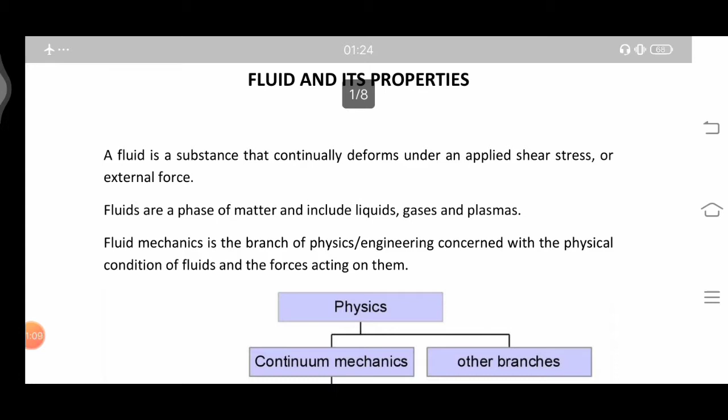Whenever we speak about fluid mechanics, we are basically dealing with the various properties of fluids and various conditions to which a fluid is exposed. That includes all the forces acting on them. Whenever a fluid is at rest or in motion, or due to its various properties, it will observe many kinds of changes or forces within itself. These are the things we are going to study in fluid mechanics.

First of all, let's read the definition of fluid mechanics. Fluid mechanics is the branch of physics or engineering concerned with the physical condition of fluids and the forces acting on them. As I said, it is concerned with the physical condition of the fluids, such as the temperature, density and viscosity, and the forces acting on it, whether it is at rest or in motion.

Okay, so what is basically a fluid? A fluid is a substance that continually deforms under an applied shear stress or external force. Suppose you consider a particular element of fluid and you apply some force on it, say a shear force; the fluid is surely going to deform continuously, unlike a solid, which may or may not deform.

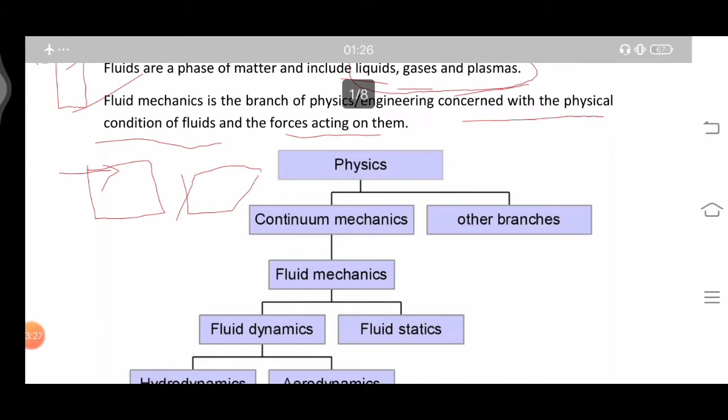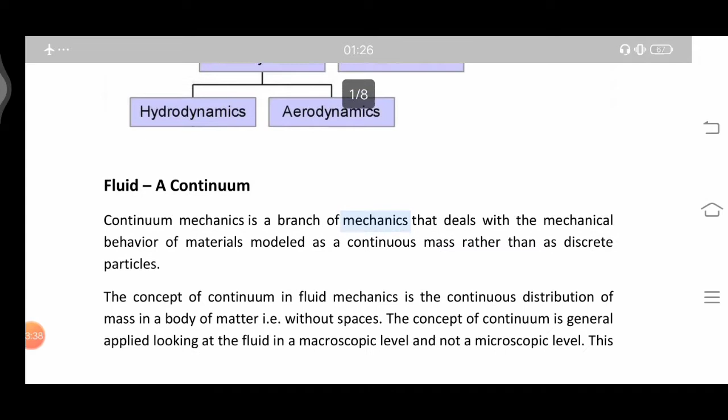Here one classification is given. If you take up physics, it is divided into continuum mechanics and other branches. So what is continuum mechanics? Continuum mechanics is the branch of mechanics that deals with the mechanical behavior of matter modeled as a continuous mass rather than as discrete particles.

In continuum mechanics we consider a body as a continuous mass of various particles, not just a single unit of discrete particles. We take up something bulk whenever we consider continuum mechanics. It is not like quantum mechanics, where we take smaller particles like the photon, neutron, neutrino, antineutrino, etc.

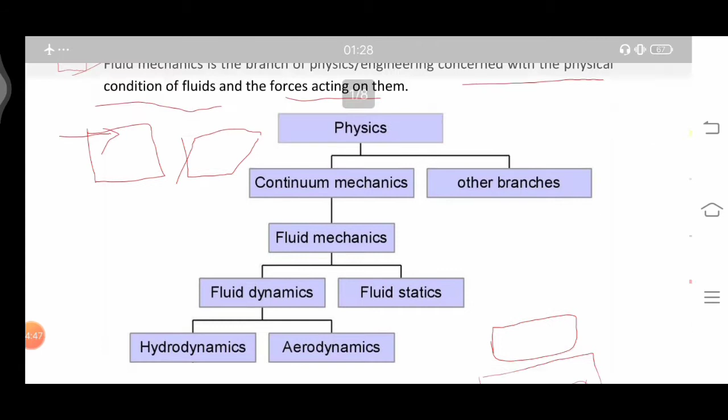So continuum mechanics deals with the mechanical behavior of materials modeled as continuous matter rather than discrete particles. Physics is divided into continuum mechanics and various other branches. Continuum mechanics includes solid mechanics, which we study in the subject known as strength of materials.

Apart from that, the other branch in continuum mechanics is fluid mechanics, which is further divided into two: fluid statics and fluid dynamics. By the name, fluid statics covers the forces or condition of a fluid when it is at rest, whereas fluid dynamics considers the same when the fluid is in motion.

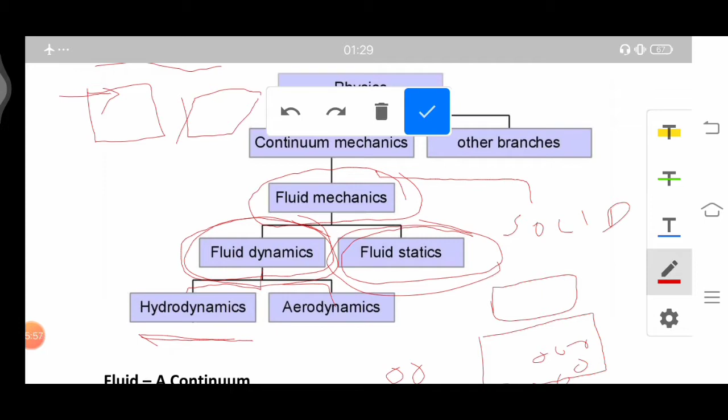Fluid dynamics is again divided into two branches, hydrodynamics and aerodynamics. There can be other branches of fluid dynamics, but mainly we consider hydrodynamics, the motion of water, and aerodynamics, the motion of air.

So considering that fluid is a continuum, the concept of continuum in fluid mechanics is the continuous distribution of mass in a body of matter that is without spaces. So if you consider the fluid mass very discretely, you will see that it is a continuous set of particles with minimum of the spaces between them. Okay, and therefore it is a continuous distribution of mass in a body of matter that is without spaces.

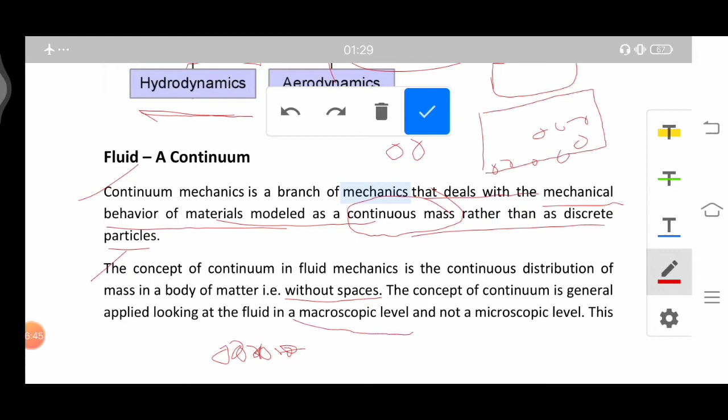The concept of continuum is generally applied looking at the fluid in macroscopic level. So we consider that the fluid is in macroscopic level and not in a microscopic level. So this helps in determining the fluid as a point function, like plotting the velocity profile of a fluid, measuring the temperature of fluid at a particular point in the fluid, etc. So assumptions are valid considering the fluid at macroscopic level only. So you cannot consider the fluid to be microscopic, we will consider it as macroscopic.

So that is why we are considering the fluid to be macroscopic, because in continuum mechanics we consider the object or the material to be of some continuous mass. So that thing is only possible if the continuous mass is present in bulk, which is solely present at the macroscopic level, not at a microscopic level. So therefore assumptions are valid considering fluid at macroscopic level only.

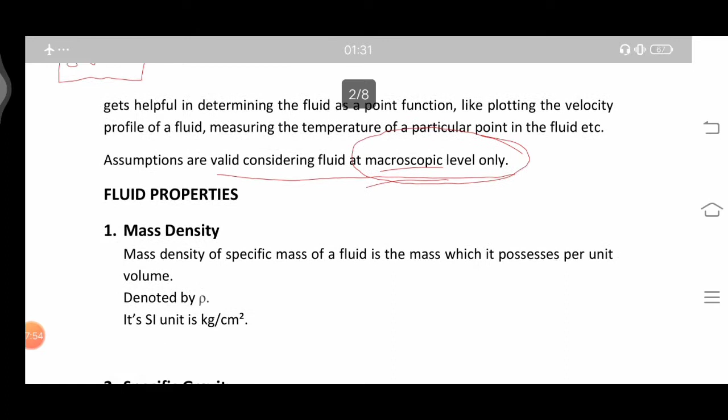So after we have this brief introduction about fluid and fluid mechanics, let us move on to the important part, that is the fluid properties. So first we come up with the mass density. So mass density is basically the specific mass of a fluid. Mass density or specific mass of a fluid is the mass which it possesses per unit volume. So basically it is the normal density which we deal with as the mass per volume.

Okay, so this is denoted by the letter rho. Its SI unit is kg per centimeter square, or it is actually kg per centimeter cube. It should be kg per centimeter cube.

Next, moving on to the next property, that is the specific gravity. So specific gravity is the ratio of the specific weight of a fluid to the specific weight of the given reference, that is the standard material. So when you consider the specific weight of a particular fluid with respect to the specific weight of a given standard, what we represent as a standard is the specific weight of water at 4 degrees centigrade, and this is our standard material. And with respect to it, when we take the specific weight of the fluid, we get the specific gravity.

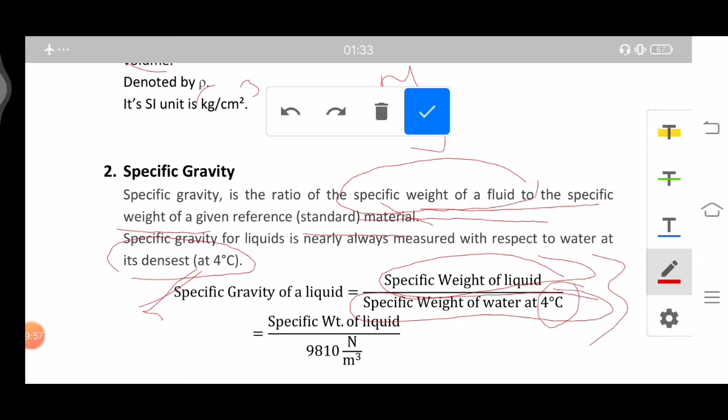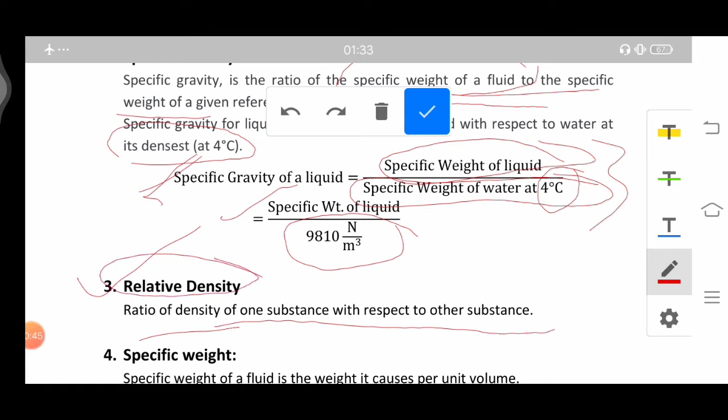So specific weight of liquid upon 9810 Newton per meter cube. It will be taken as 9810 when it is multiplied by 9.81 meter per second square, that is the gravitational acceleration. Next is the relative density of one substance with respect to another substance. It is actually the ratio of the density of one substance with respect to another substance. Suppose we consider the density of one particular oil, so with respect to water it has this much density. So when we are comparing two liquids, we take up the relative density, and similarly we also take the specific gravity when we are comparing.

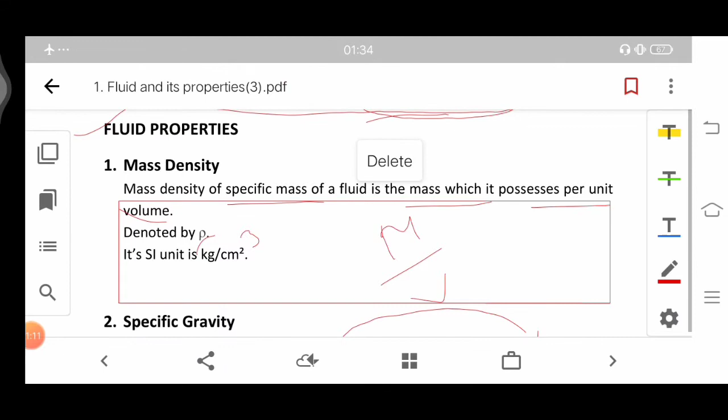Next comes the specific weight. The specific weight of a fluid is the weight it possesses per unit volume. So the weight of the fluid per unit volume is the specific weight. So just do not confuse it with mass density. Mass density is the mass per unit volume, whereas the specific weight is the weight per unit volume and denoted by the letter gamma. For water it is gamma W and its SI unit is Newton per meter cube.

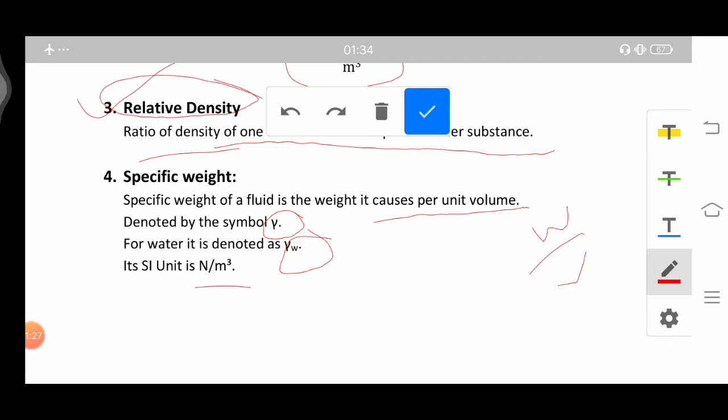Next is the specific volume. Specific volume of a fluid is the volume of the fluid per unit weight. It is the reciprocal of specific weight, and thus the SI unit is meter cube per Newton. So specific volume of a fluid is basically the reciprocal of the specific weight. So here we can say that it is volume upon the weight. Therefore the SI unit comes out to be meter cube per Newton.

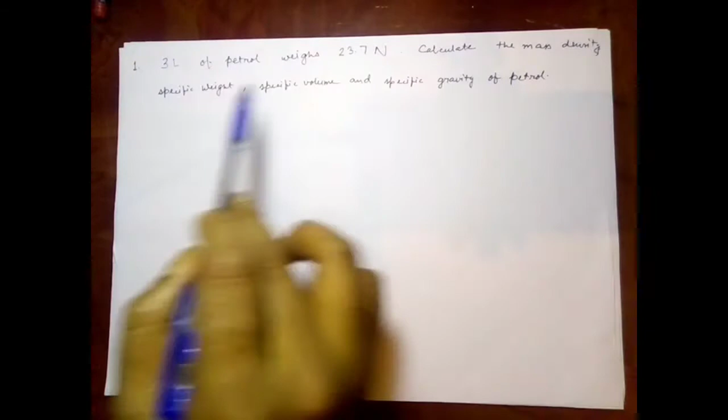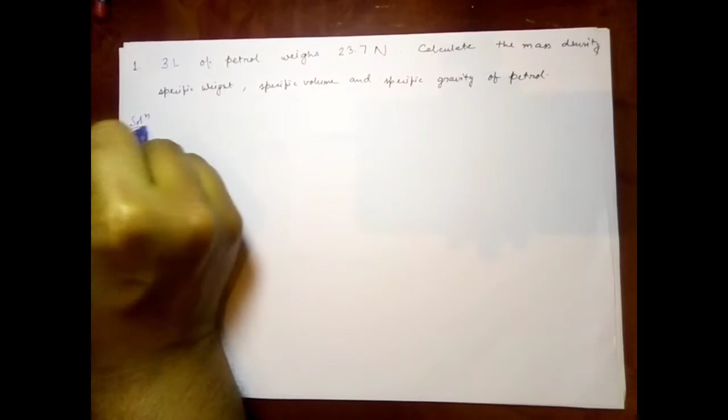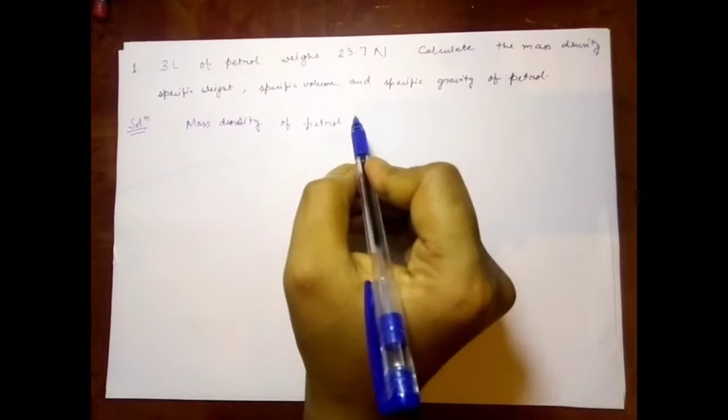So let us take up a problem. 3 liters of petrol weighs 23.7 Newton. Calculate the mass density, specific weight, specific volume and specific gravity of petrol. Whatever definitions we have learnt now will all be applied in this problem. Let us consider the mass density first. The mass density of petrol, let us take it as rho p, will be mass by volume.

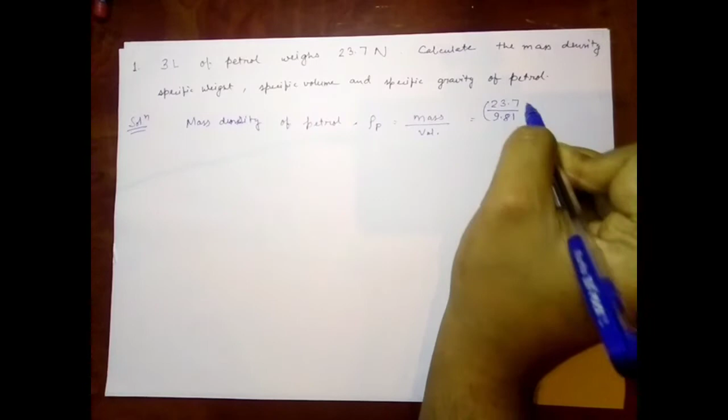So how to get the mass? Mass is basically the weight, 23.7, upon the gravitational acceleration, that is 9.81, upon the volume which is given as 3 liters. Upon calculating this we will get 0.805 kg per liter, because this is in kg and this is in liters, which is actually 805 kilogram per meter cube.

Next is the mass density of water. Mass density of water, let us take it as rho W, is actually 1000 kg per meter cube. You can take it as that. And specific gravity of petrol will be 805 upon 1000. Specific gravity is basically the ratio of these two, and it will be 0.805.

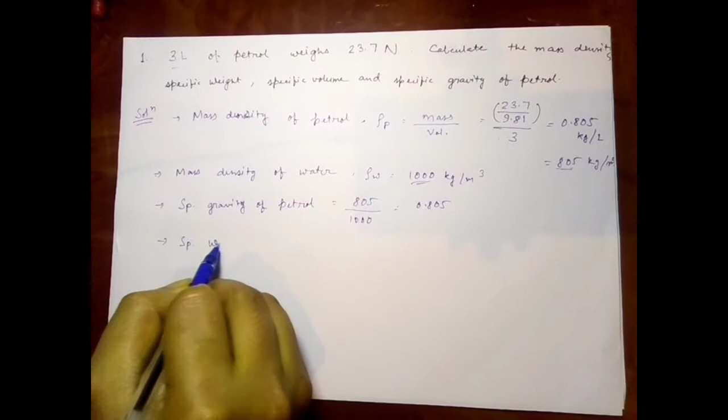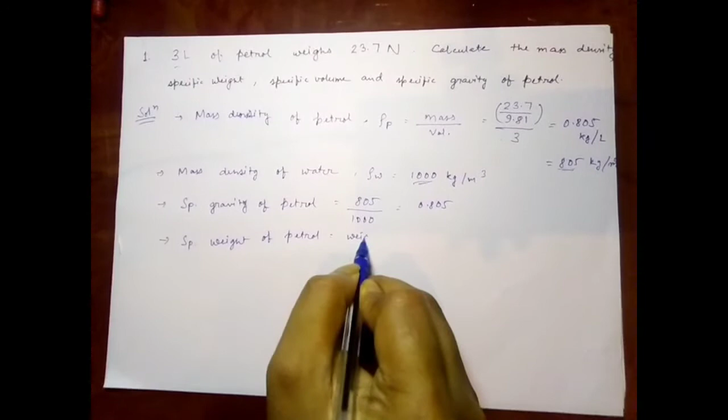Again, specific weight of petrol, that is weight per unit volume, will be equal to 23.7 upon 3, that is 7.9 newtons per liter, which is 7.9 kilonewton per meter cube. If you are having any kind of confusion, just keep in mind that 1000 liters is equal to 1 meter cube, and everything is based upon this.

Next is the specific volume, which is volume per unit mass. It is given by 1 upon rho p, which is 1 upon 805, and it will be around 1.242 times 10 to the power minus 3 meter cube per kg.

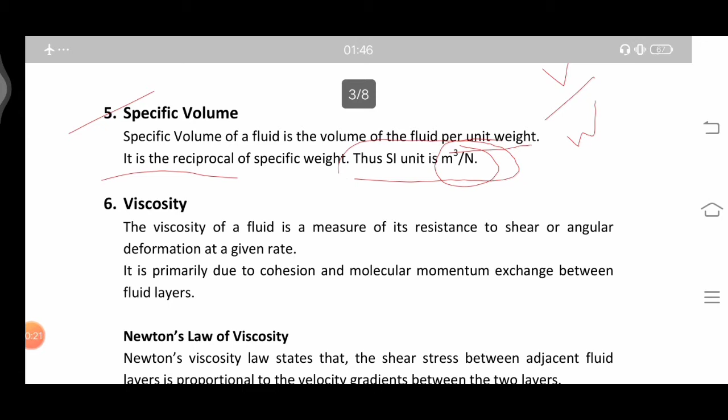The next property is a very vital property, and it has wider use in the very next chapters. This is viscosity. The viscosity of a fluid is a measure of its resistance to shear or angular deformation at a given rate. So whenever a fluid element is given some shear force, it will try to resist it before moving in the direction in which the force is applied. So it is basically a resistive force.

Just like friction, viscosity is another resistive force. Friction is what you observe in solids. Viscosity is found in liquids, and friction is between two different materials, whereas viscosity can be within the same fluid and in its various layers. If we take a fluid element and divide it into various layers, even these minute layers will have viscosity while sliding against each other.

It is primarily due to the cohesion and molecular momentum exchange between fluid layers. The more the cohesive force, that is, the more the attraction between similar particles of the fluid, the more viscosity it will induce, and thus molecular momentum exchange between the fluid layers.

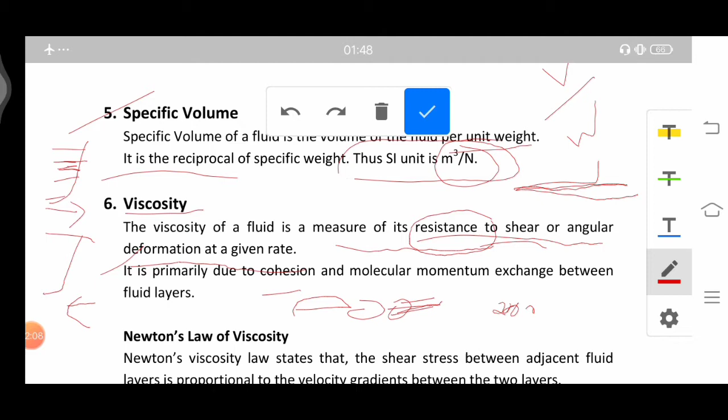Newton gave a law regarding viscosity which states that the shear stress between adjacent fluid layers is proportional to the velocity gradient between the two layers. So what is the velocity gradient? It is basically this term: du is the change in velocity, upon dy, the change in distance. So this is the velocity gradient.

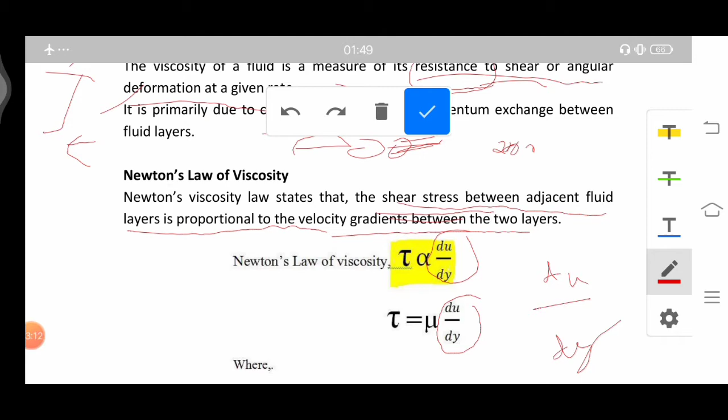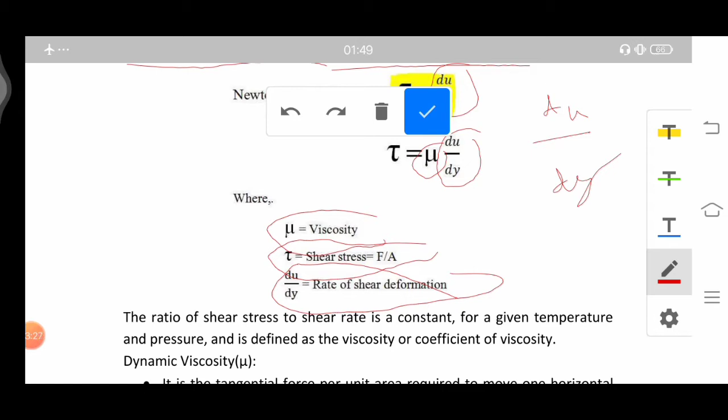The shear stress between adjacent fluid layers is proportional to this velocity gradient. To remove this proportionality, we introduce a coefficient known as the viscosity or the coefficient of viscosity. So mu is the viscosity, tau is the shear stress, and du upon dy is the rate of shear deformation or the velocity gradient.

So the ratio of the shear stress to shear rate is constant for a given temperature. This ratio of shear stress to shear rate will be constant for a particular temperature only, and the same thing may not be valid if the temperature is altered. And similarly with pressure, it will be taking place with a particular pressure only, and the results can be different if the pressure is altered, and the same is true for temperature.

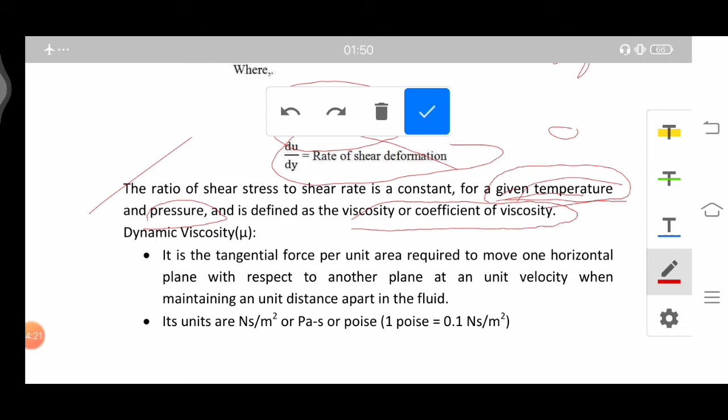This ratio of shear stress to shear rate is defined as the coefficient of viscosity. So if you take this tau and divide it by du/dy, this will give you the constant mu, which is the coefficient of viscosity.

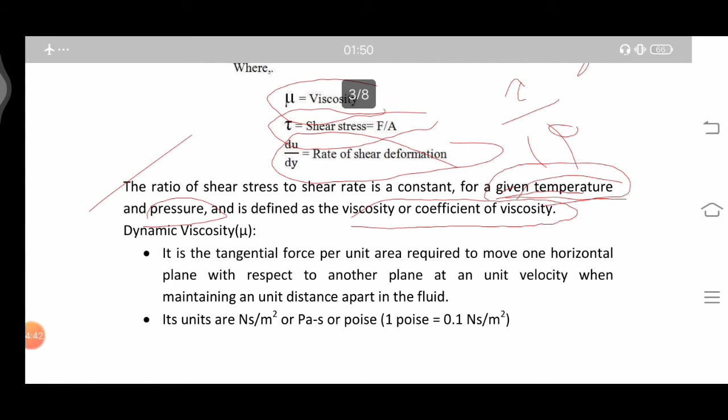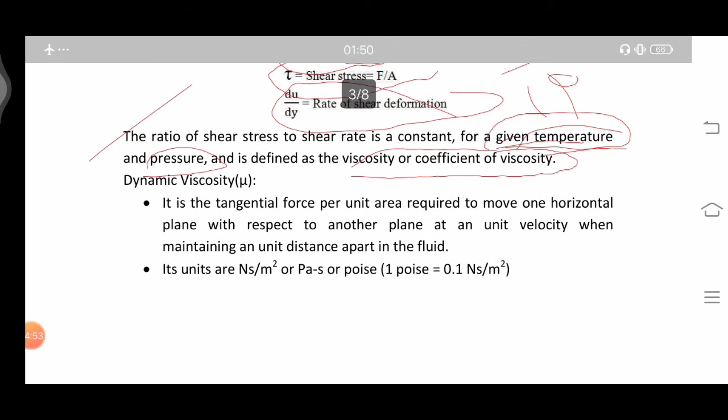So again, there are two types of viscosity. One is the dynamic viscosity and another is the kinematic viscosity. Dynamic viscosity is the tangential force per unit area required to move one horizontal plane with respect to another plane at unit velocity while maintaining a unit distance apart in the fluid. That tangential force acting per unit area will be your dynamic viscosity.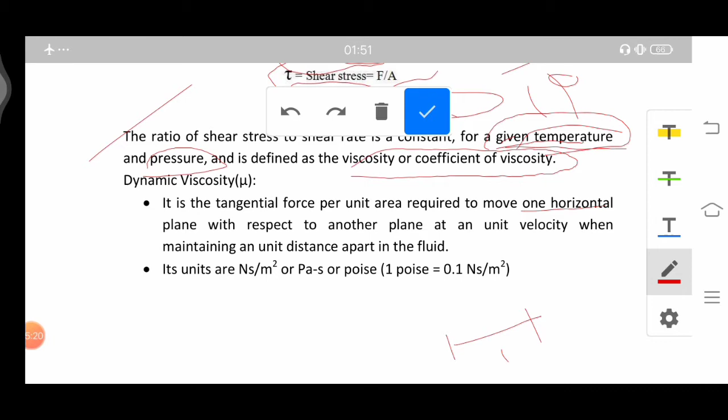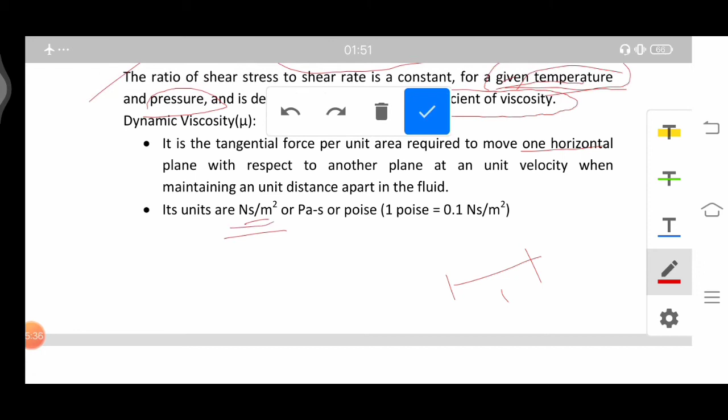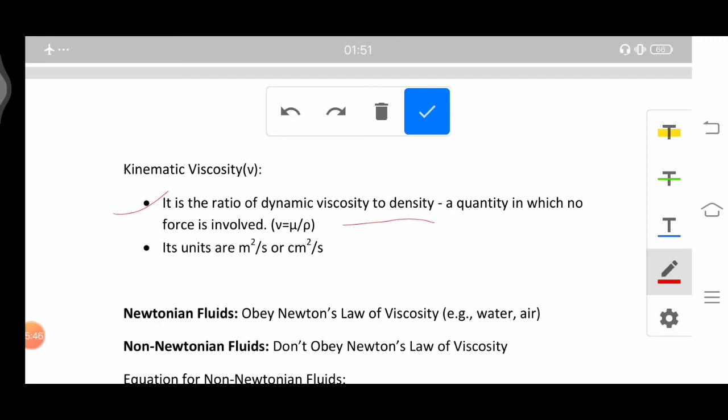Okay, then comes its unit, that is Newton second per meter square, or you can say Pascal second or Poise. This is in SI unit. And next is the kinematic viscosity. It is the ratio of dynamic viscosity to density, a quantity in which no force is involved. So whenever we are considering the forces, we use the dynamic viscosity, but whenever we are not considering the forces, we use the kinematic viscosity.

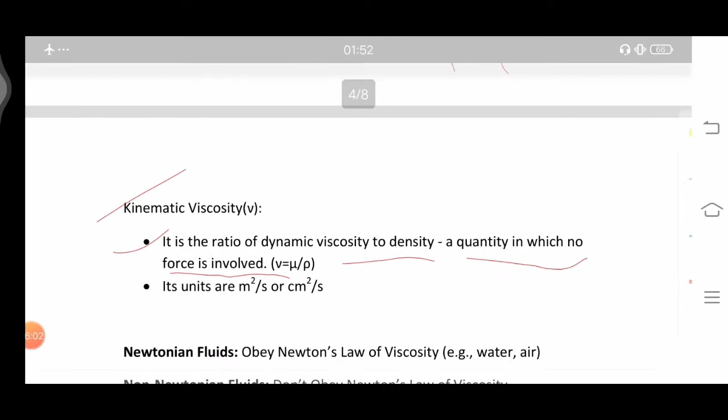So the basic difference is that there is an application of force when it comes to the dynamic viscosity, and secondly, the kinematic viscosity is the ratio of dynamic viscosity and the density of the fluid, and therefore its units are meter square per second or centimeter square per second.

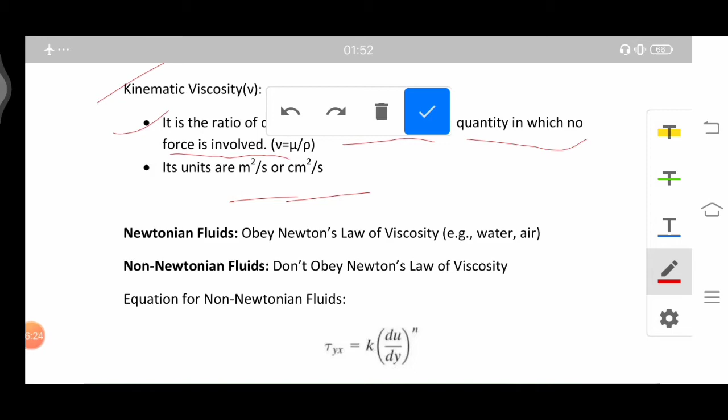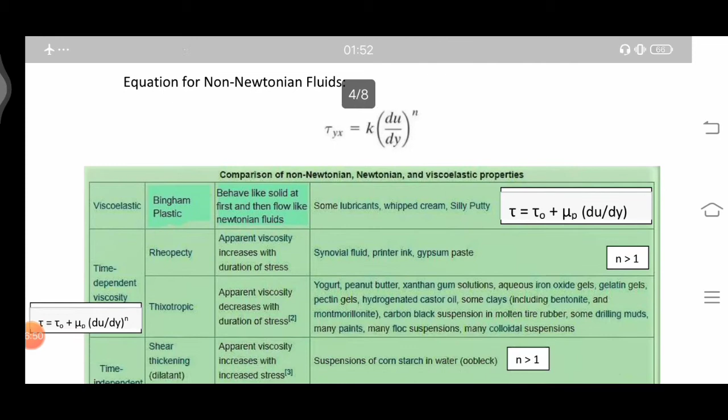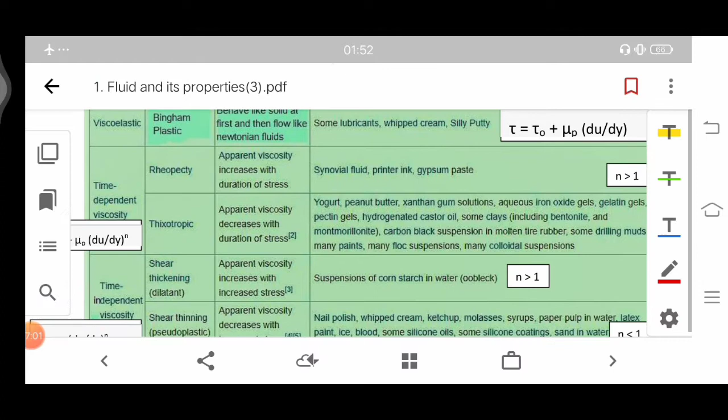So there are two types of fluid again. One is the Newtonian fluids, which obey the law of viscosity, like water and air, and there are various liquids which don't obey Newton's law, and they are known as non-Newtonian fluids. So just go through this chart once; it shows a comparison of non-Newtonian, Newtonian and viscoelastic properties. So basically there are time dependent viscosity, time independent viscosity and viscoelastic material.

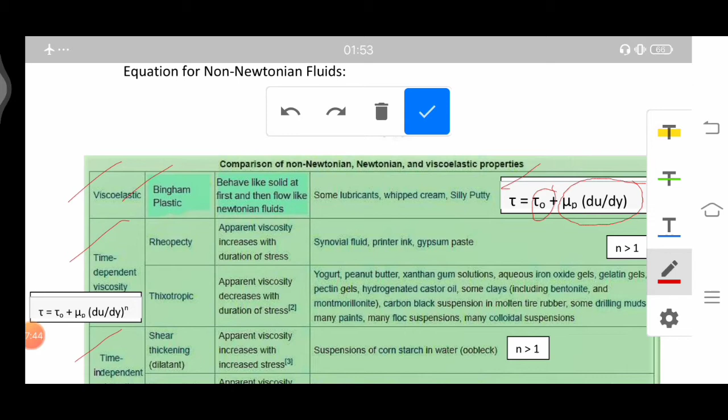Viscoelastic materials are the Bingham plastics, which behave as plastics and are quite similar to Newton's law of viscosity to a certain extent. You can see the equation, tau is equal to tau naught plus mu P du/dy. This part is similar to Newton's law of viscosity, but there is an additive constant. So Newton's law of viscosity will be obeyed by this type of fluid after a certain extent, and therefore they are known as Bingham plastic fluids. They behave like a solid at first, until this barrier is broken, and then they flow like Newtonian fluids.

Next is the time dependent viscosity, which includes the rheopectic and thixotropic fluids. For rheopectic fluids the apparent viscosity increases with the duration of stress, and for thixotropic fluids the apparent viscosity decreases with duration of stress, and it is because n is greater than 1 for rheopectic fluids and less than 1 for thixotropic fluids.

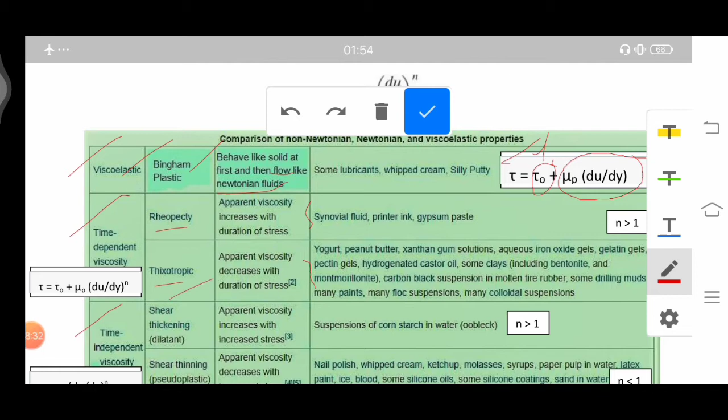Again, we have the time independent viscosities, that is the shear thickening or dilatant fluids, and the shear thinning or pseudoplastic fluids. Why are they shear thickening? Because the apparent viscosity increases with increased stress. And the apparent viscosity decreases with increasing stress for the pseudoplastic fluids. It is because n is greater than 1 and n is less than 1.

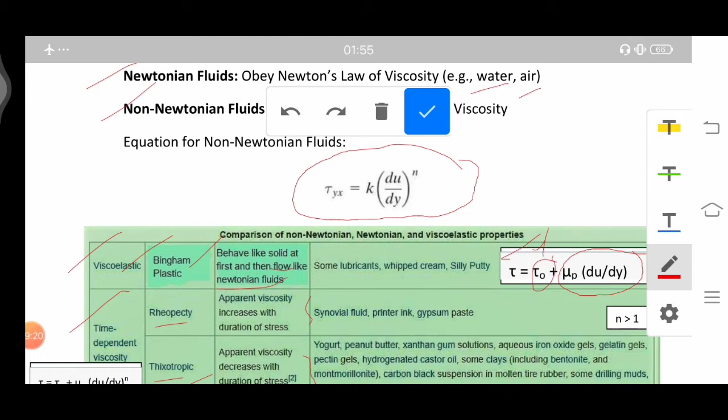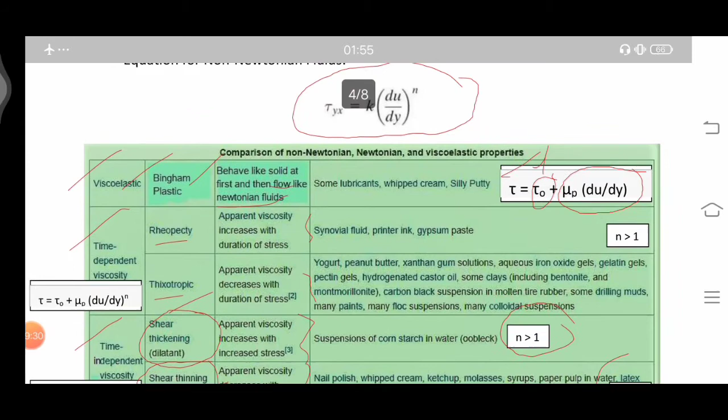Why is this n being considered? It is considered in this particular generalized equation. If n is less than 1, then we have shear thinning or pseudoplastic fluids, or thixotropic fluids. But when it is greater than 1, we have rheopectic and dilatant fluids. And whenever there is an additive constant and n is equal to 1, like Newtonian fluids, then it is the Bingham plastic, which partially follows the Newtonian law of viscosity.

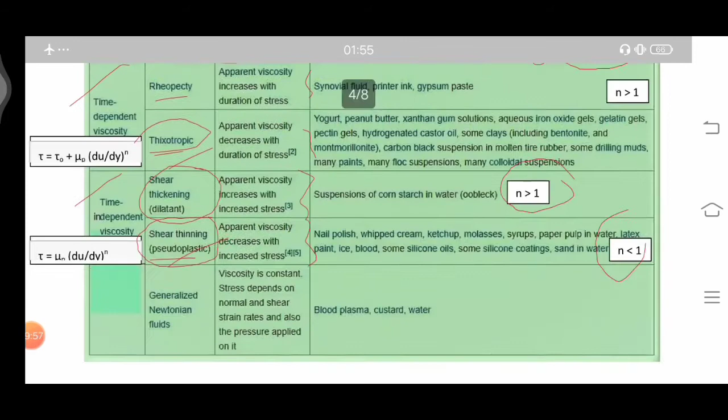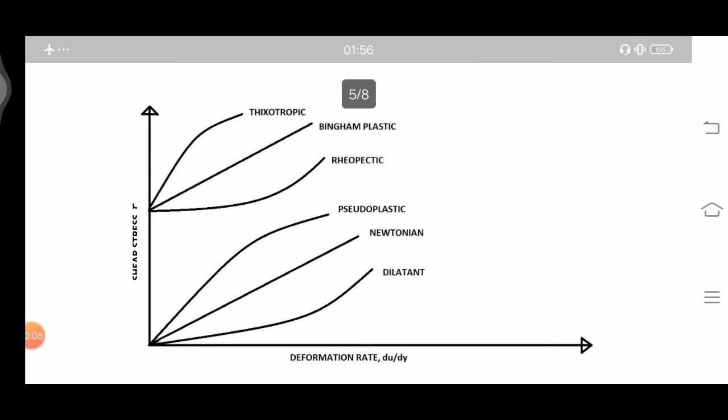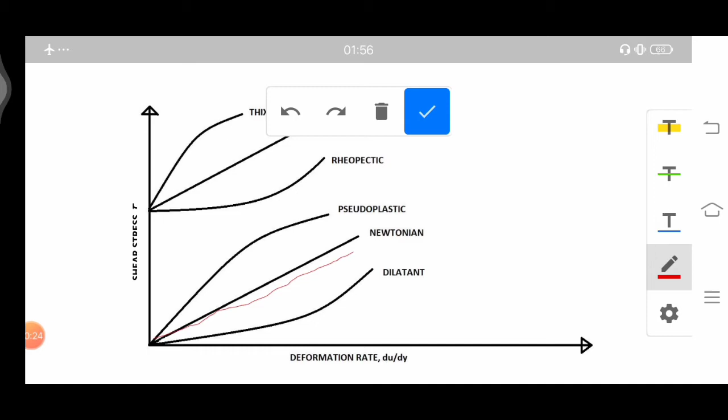So here is the graph. It is totally based upon the equation which we have shown for the Newtonian and non-Newtonian fluids. You can see a complete straight line for Newtonian fluids, and it is all because it's just du upon dy, and there is no exponent over it. And the dilatant fluid has an exponent greater than 1, so we therefore have an increasing shear stress with respect to the deformation rate.

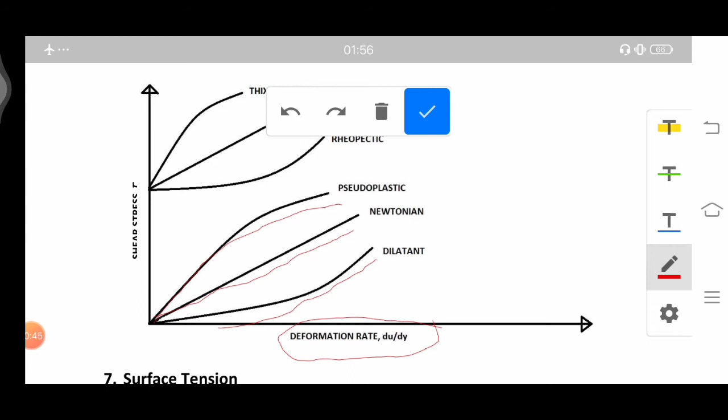And similarly, pseudoplastic fluids have a value of n less than 1, and therefore we have a decreasing curve. Similarly, we have the same thing for thixotropic and rheopectic, but the thing is that there will be a certain amount of shear stress already prevalent in that fluid before they start showing shear deformation. Okay, so at first they won't be moving, and after certain application of the force or the stress, they will start moving.

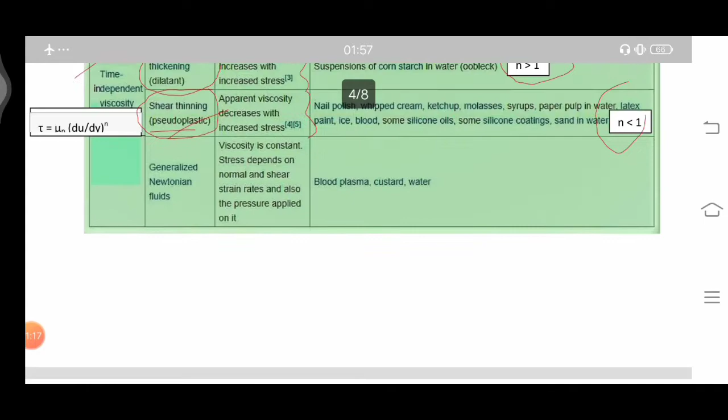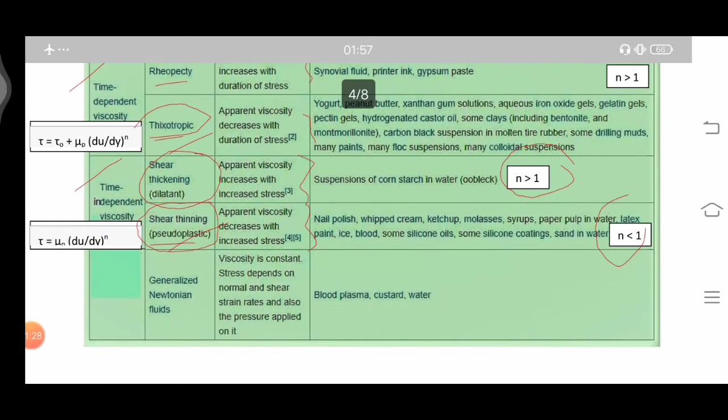You can also go through the examples of various types of fluids, like here given in this chart, and the notes will be given to you in the description. So let us just proceed to do one problem regarding viscosity.

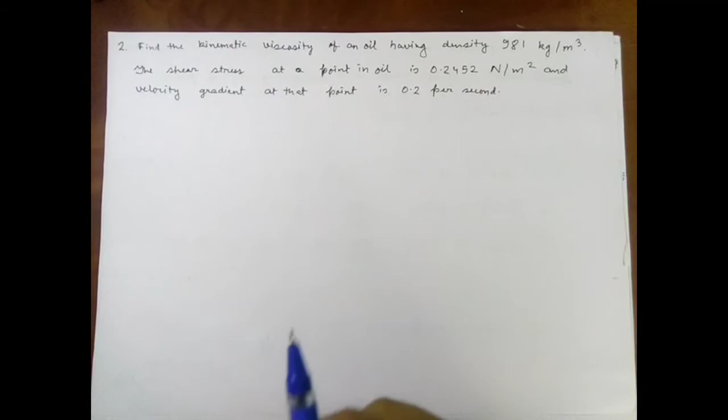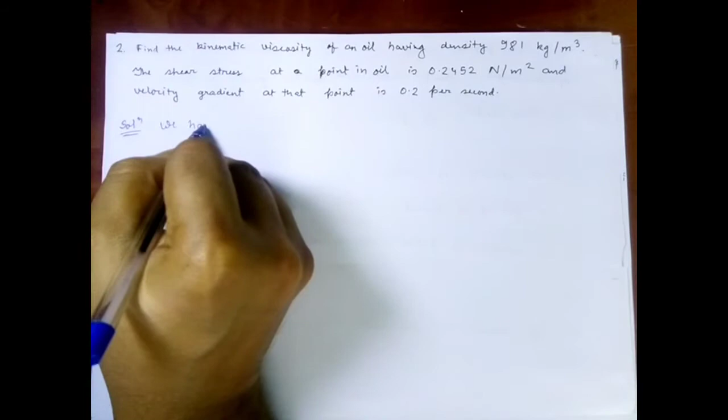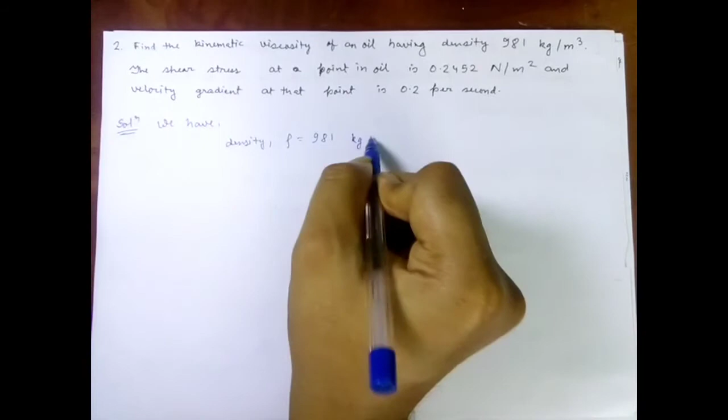The question says: find the kinematic viscosity of an oil having density 981 kg per meter cube, and the shear stress at a point is given as 0.2452 Newton per meter square, and the velocity gradient at that point is 0.2. So we have what is given to us, that is the density rho as 981 kg per meter cube, this is mass density, and shear stress tau is given by 0.2452 Newton per meter square.

Okay, and also the velocity gradient du upon dy, that is 0.2 per second. So using Newton's law of viscosity, that is tau is equal to mu du upon dy, we have tau as 0.2452, it is given, equal to mu times 0.2, therefore mu equals 0.2452 upon 0.2, and that is 1.226. Just take care of the unit, that is Newton second per meter square.

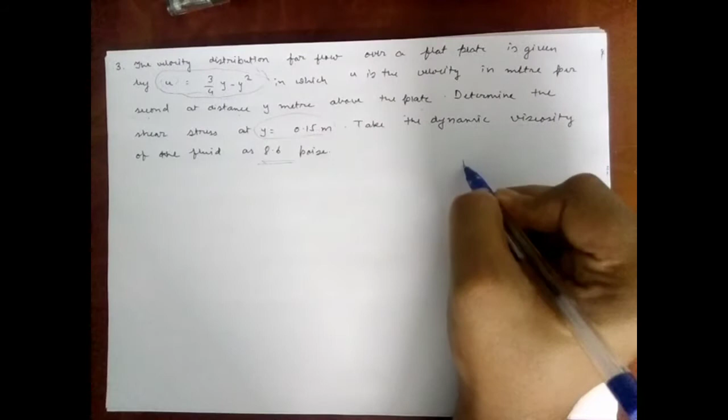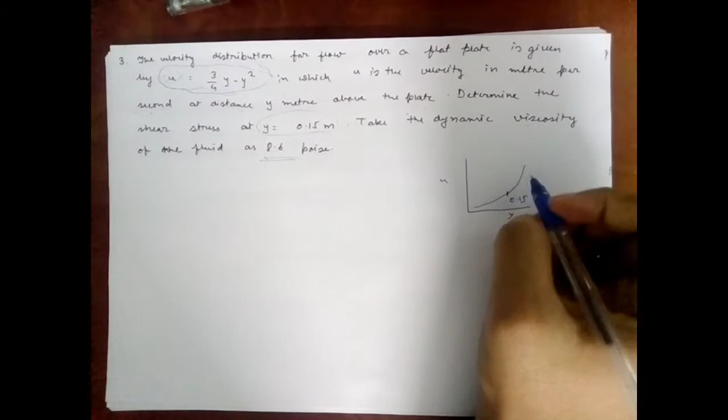Okay, so first of all, just consider that we are given a velocity profile something like this, a relation between u and y, and we are asked to find the shear stress at a point, suppose 0.15. So it will be more convenient if we obtain the velocity gradient at this particular point at y equal to 0.15, and at the same time apply this in the equation, that is Newton's law of viscosity.

Okay, so to get that, we take u equal to 3 by 4 y minus y square. If we differentiate it with respect to y, we get du upon dy equal to 3 by 4 minus 2y. It's nothing but a simple differentiation. So this is nothing but our shear deformation, or you can say our velocity gradient.

So now what we can do is that at y equal to 0.15, you will have du/dy equal to 3/4 minus 2 times 0.15, and it will be equal to 0.45. So at y equal to 0.15, du/dy, or the velocity gradient, will be 0.45.

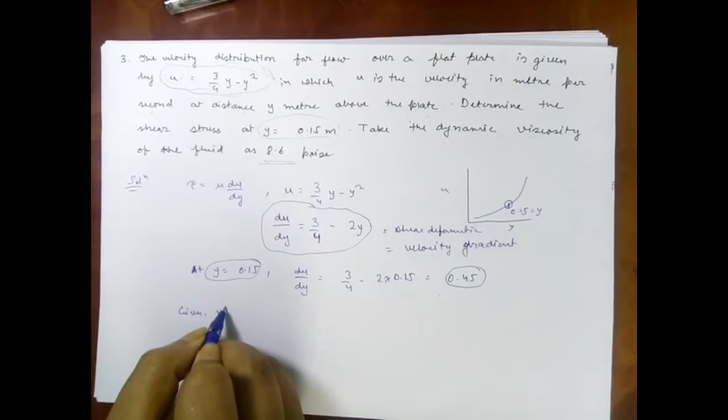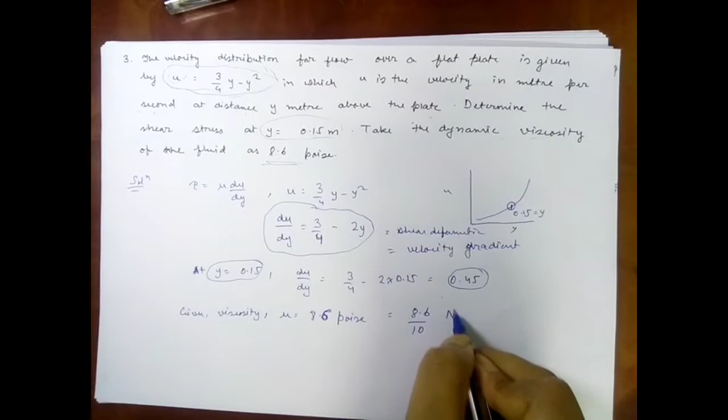And also given viscosity mu is equal to 8.6 poise, which is basically 8.6/10 Newton second per meter square, because 1 poise is equal to 1/10 Newton second per meter square.

So we have the velocity gradient, we have the viscosity, and thus we can obtain our shear stress. That is, therefore, shear stress tau is equal to mu times du/dy, our velocity gradient, and it will be equal to 8.6/10 times 0.45 Newton per meter square, and therefore it will be around 0.387 Newton per meter square.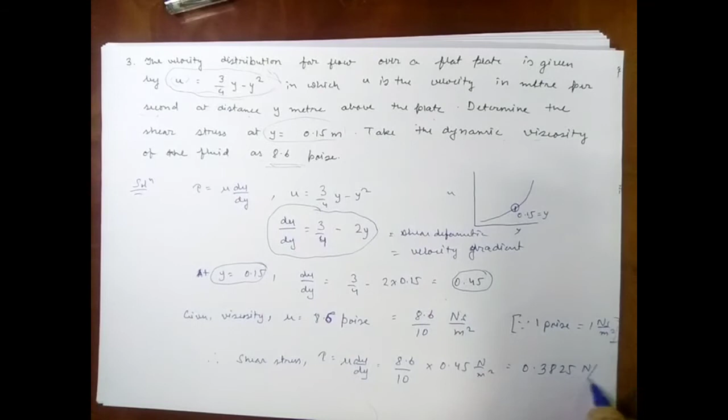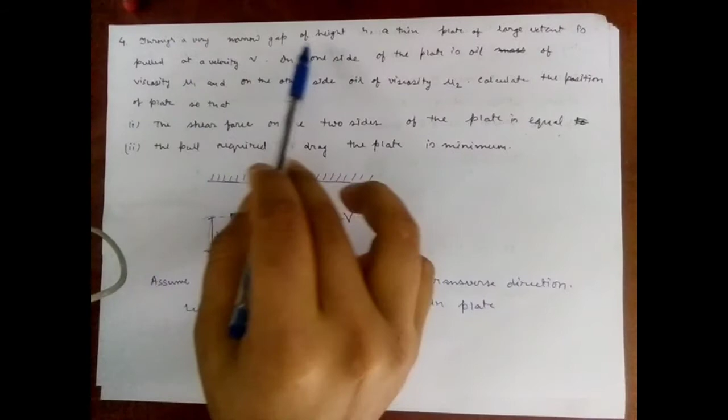So moving on to the next question. Through a very narrow gap of height h, a thin plate of large extent is pulled at a velocity v. On one side of the plate is oil of viscosity mu1, and on the other side oil of viscosity mu2. Calculate the position of the plate so that the shear force on the two sides of the plate is equal and the pull required to drag the plate is minimum.

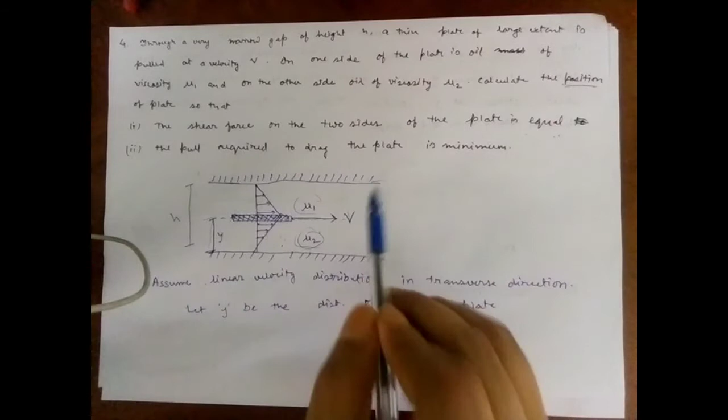So in this case, there is a thin gap within which there is a very thin plate, and it has two different fluids on both sides. We are asked to find the position of the plate so that the shear force on the two sides of the plate is equal and the pull required to drag the plate is minimum. So there are two conditions which we have to use. Let y be the distance of the thin plate.

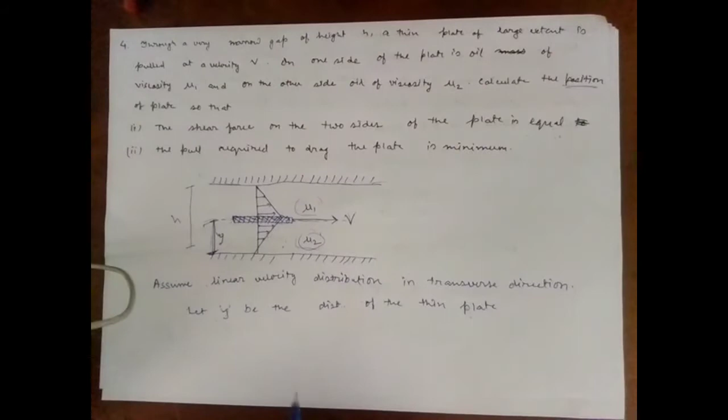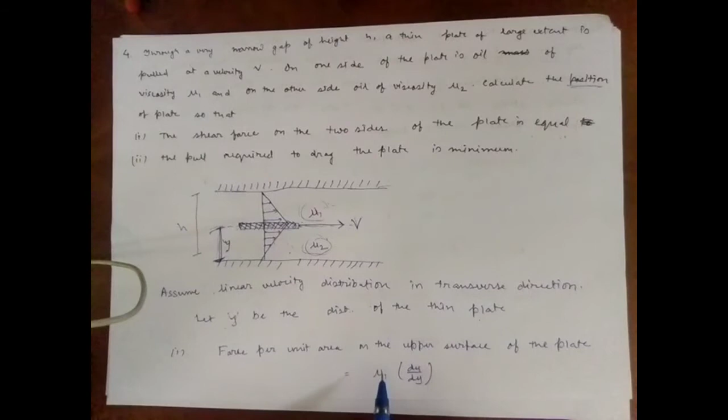Now force per unit area on the upper surface of the plate is given by mu1 du/dy, because on the upper surface of the plate we have the oil with viscosity mu1. Velocity is given by v, so we will take v in place of du, and in place of dy we will have h minus y, because we have considered this length to be y.

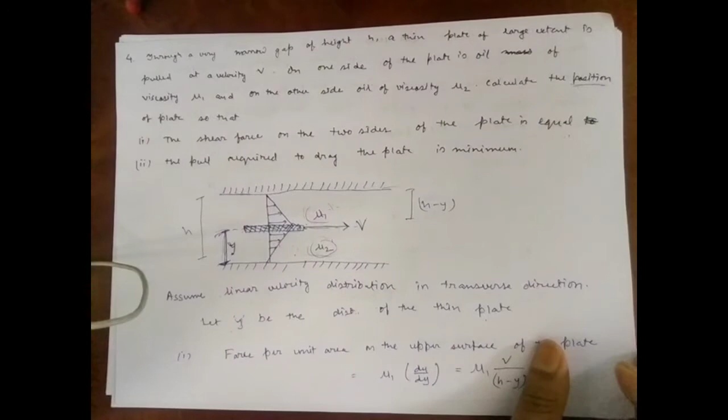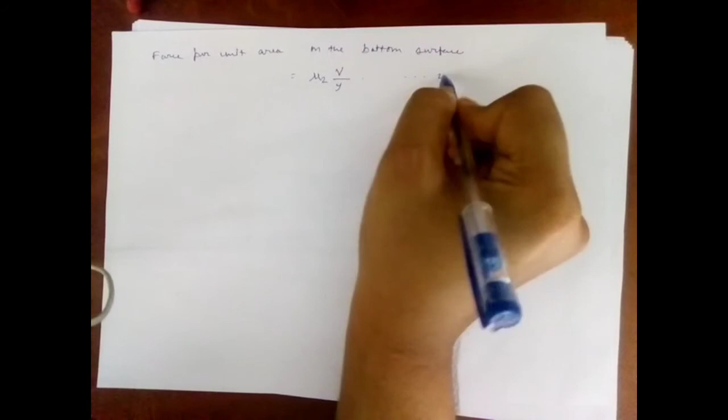Similarly, the force per unit area on the bottom surface of the plate will be equal to mu2 times v upon y. So let us consider this to be equation 2 and this to be equation 1.

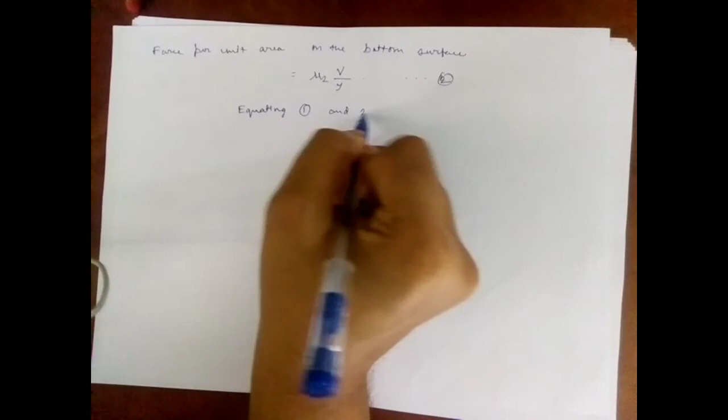So equating 1 and 2, we get mu1 v/(h minus y) equal to mu2 v/y. On solving this we will get y equal to mu2 h/(mu1 plus mu2).

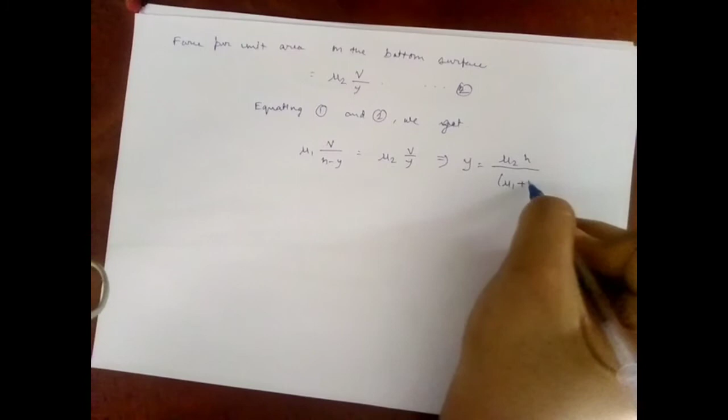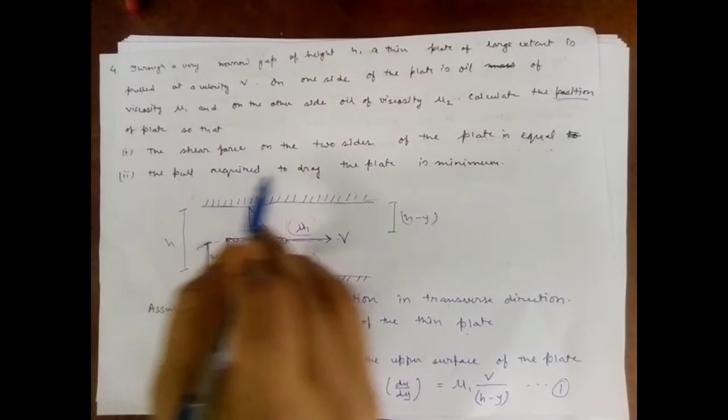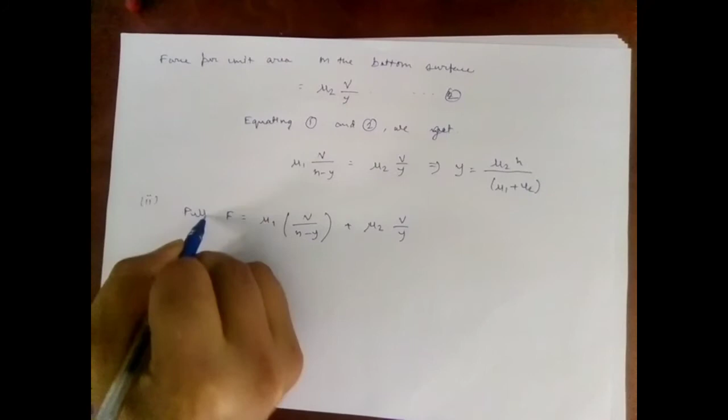Now in part 2 of the problem, we are asked to find the position when the pull required to drag the plate is minimum. The pull will be due to the force which will be the sum of both shear stresses, that is mu1 v/(h minus y) plus mu2 v/y, the sum of shear stresses due to both the oils on the two sides of the plate.

So for F to be minimum, we know dF/dy shall be equal to 0. Simple mathematical concept. Upon differentiating with respect to y, we get mu1 v/(h minus y) squared minus mu2 v/y squared equal to 0. Solving this, we get y equal to h/(1 plus square root of mu1/mu2).

So that's all for this video, and the later part will be continued in the next part regarding the properties of fluid, starting with surface tension, a new property of fluid.